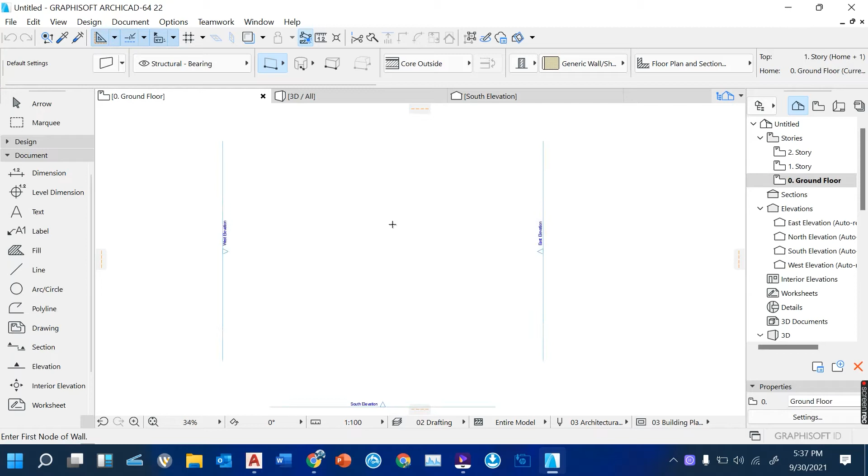When you open ArchiCAD, the white part which I'm showing here is called the model. This is where we make our drawings. You can see we have 4 objects here.

These are just elevations. When you zoom using the scroll bar on your mouse, you'll find that's north elevation, this is west elevation, this is east elevation, and this is south elevation. Your drawing must revolve around this particular section or boundary so that it allows you to view your elevations.

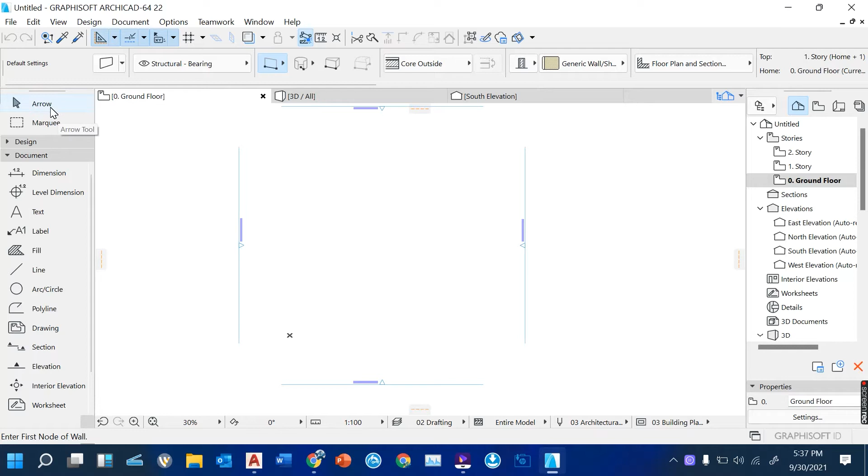These elevations can be moved depending on the size of your project. To pick any object or item in the model space, we use the arrow tool. When you click on the arrow tool, it allows you to select. When you click, you can see them being highlighted one by one up to the top. That's how we select objects or tools or items in the model space.

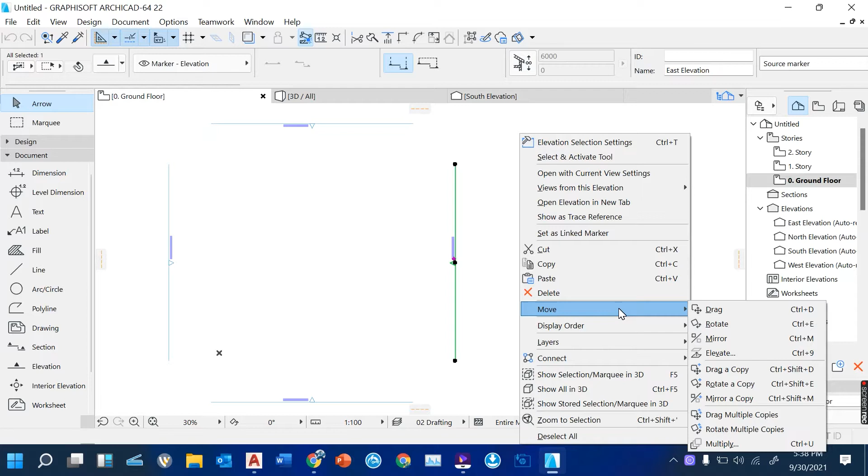You can either move. When you click on one of the elevations, you right click beside it, then you go to move. When you click on move, you can see we have drag, rotate if you want, and mirror. I want us to drag. When you click on drag, you click on that elevation, then you can drag it to enlarge, or simply reduce the viewport. You can enlarge, then click out. Another shortcut, you can click on that.

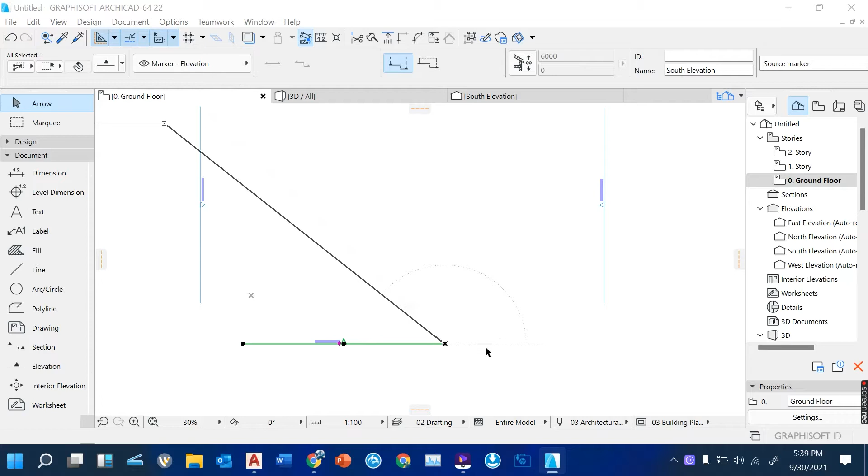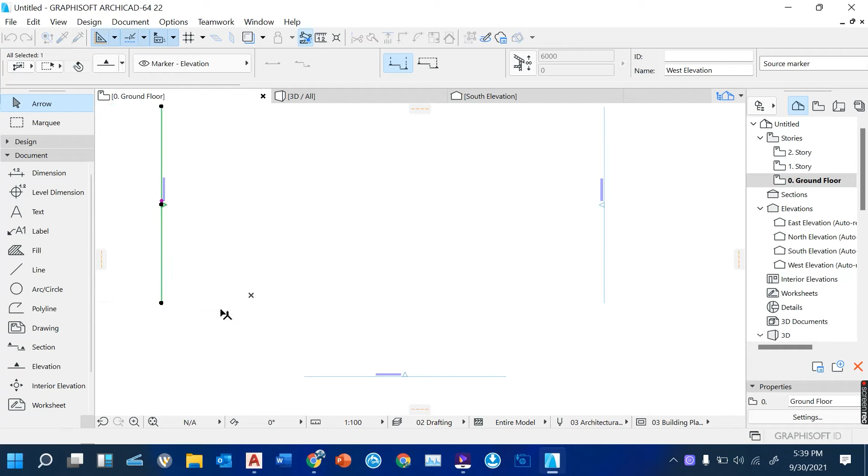These black circles on the item are called nodes. These nodes can be adjusted or used to drag. When you click on a particular node, a flyer pops in which allows you to move. You can see I'm still moving, so you can enlarge your area. You just click and then drag. So those are some of the ways you can drag or stretch elements using the nodes, when the flyer pops in after clicking the node.

As we continue, on the left side of the screen we have what we call the toolbar. The toolbar contains various tools used for designing an architectural plan. It's divided into 3. Let me close that arrow. You'll see we have design - the arrow is for selection. Then we have design; when you click to expand the arrow, you will find the design elements or design tools for architectural work.

They range from wall up to mesh. These are various tools required when doing architectural designs. Then we also have document. When I click on document, this is now the documentation detailing or describing your project or plan that you are designing. We have the dimension tool, text which you can type, fill tool, lines and much more. After document, we now have more. Under more is where we find other elements which you can also insert in your plan. That's the toolbox.

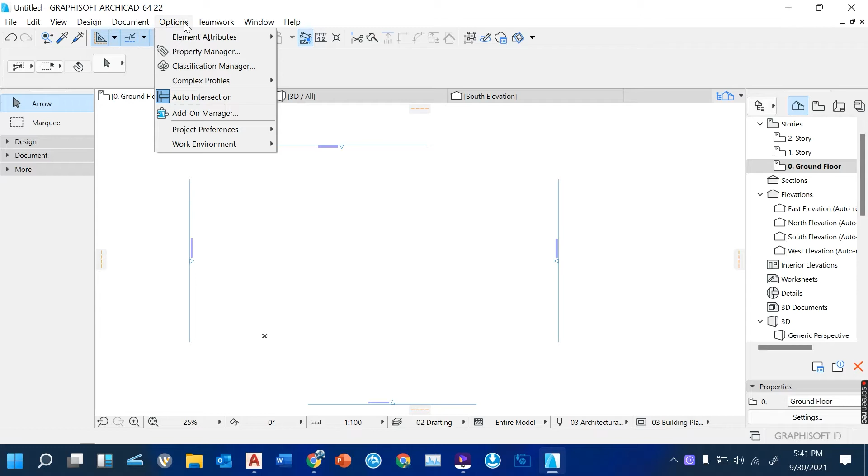So when you come to Window, they are also called palettes. So when you come to the palettes, you can see here we have toolbox, info box, and the navigator.

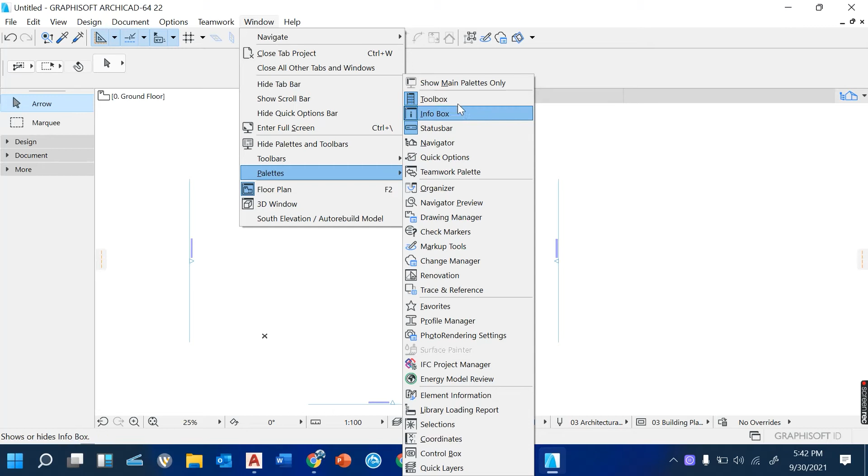Now they are all appearing on the screen. So I just want to click that. When you click it, it goes off. Sometimes maybe you closed it by mistake. So under window, you come to palettes. Then this is also called the toolbox. The little toolbox goes, so on the left we don't have nothing. We don't have the toolbox, and also don't have the navigator.

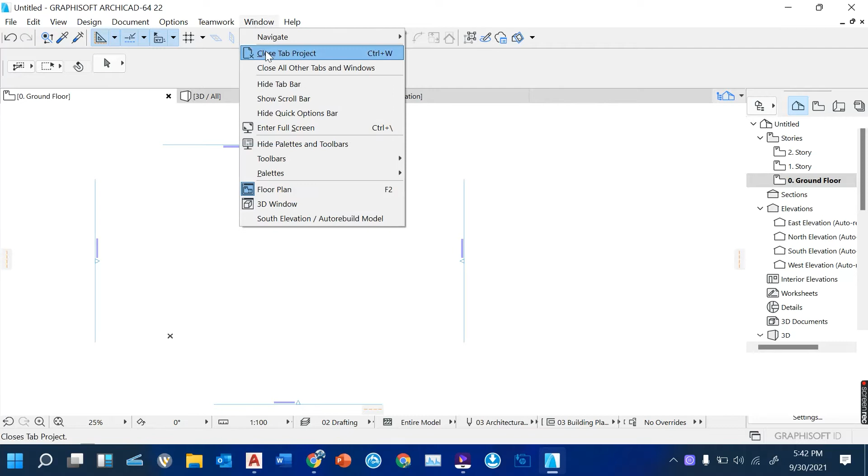So to bring them back on the screen, you still come back to window, then you click on the palettes, then just click to activate. So when you click on the navigator, you will see the navigator appearing on the right of the screen. And again, on the toolbox under the Windows tab, we have toolbox. When you click on the toolbox, you will see our toolbox appearing on the left side of the screen. So you can see that's how we can bring them on the screen.

And any other palette that you would like to use when you are doing your architectural plan. So generally, that's how we bring on palettes, how we can move elevations, how we can bring back our toolbox. Sometimes you have closed them unintentionally or mistakenly when you're doing a design. You can still bring them back, and then you can still see them appearing here on the screen.

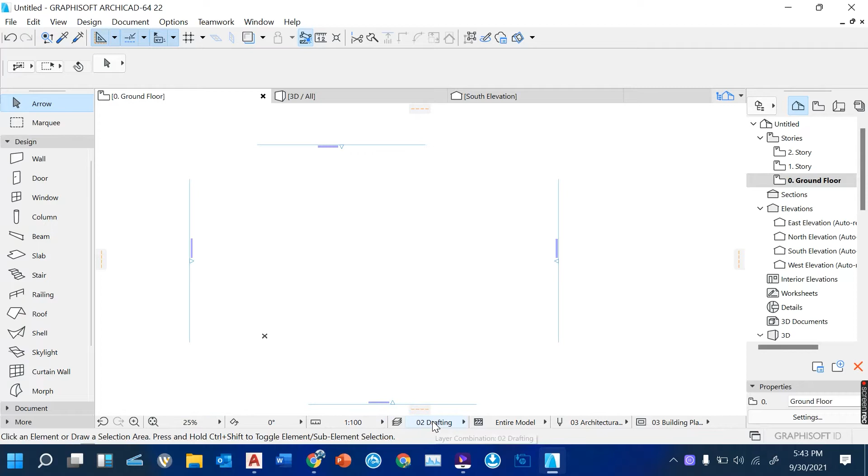Down here, we have this status bar. We have scale; you can choose the scale that you want to use for your designing. And then these are just by default - drafting the entire model, architectural, and then also the zoom.

You can also zoom up to 25, or you can just use your mouse. As you click the mouse, you can see the zoom also increases when you scroll the scroll wheel in the mouse. So you can also increase your zoom to make sure you have a clear visualization of your plan or of your project that you are undertaking or designing.

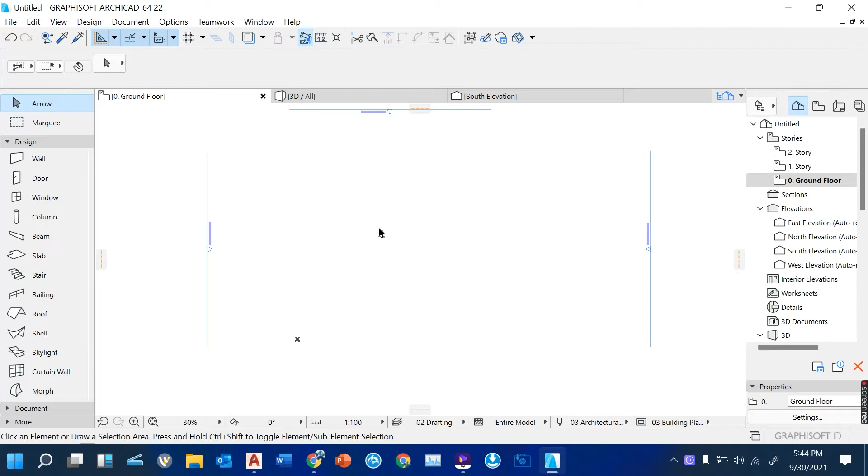Welcome back, viewers, to our continuation of the ArchiCAD program. So on the introduction part, I showed you how we can navigate through the interface of ArchiCAD. So our next lesson, we are going to discuss how now we use various tools to design a simple plan or a simple house plan.

So the concept for any plan remains the same depending on the tools which are here in the toolbox. So if you want us to start, always we start on the ground floor - that's the one which is active. Then we have story 1, story 2. We can also create stories.

So we are going to start with a simple house plan and see how these tools can help us design a simple architectural plan. So to start, always start with your wall tool. So when you click on the wall tool, you will find here in the wall tool we have what we call the info box. So when you click on the wall tool, you can see there's an icon or a tab for the wall. That helps you now make your settings for the wall.

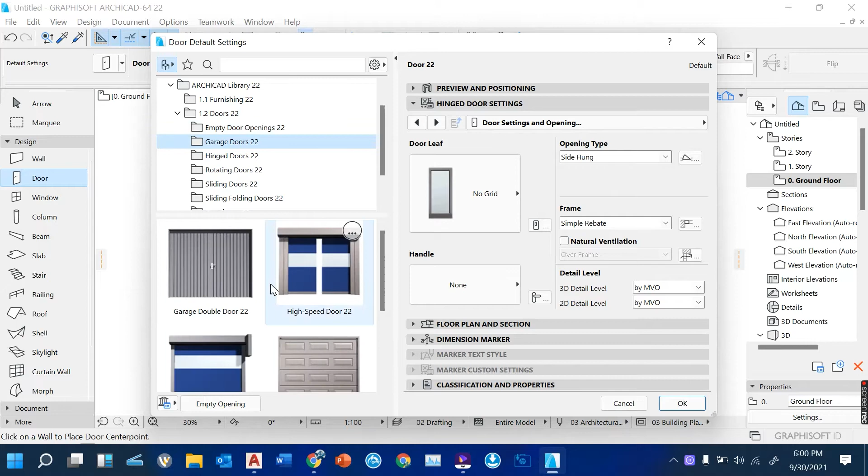Same to doors - when you click on the door, you can see in the info box we have the symbol for door. So when you click, you will find it only opens the folder containing doors, because that's the tool that we have picked. So we have various types of doors. By clicking down here, you can scroll and see the types of doors that you want to use. They have got a variety of doors. Then you cancel. Same to windows.

When you click on the window, you can see the window icon. It will only open the folder containing windows. As I've said earlier, that's the tool that you have picked, so it opens that specific folder containing the particular tool that you have picked here in the toolbox, so that you can have your settings. You can see our settings dialog box appearing.

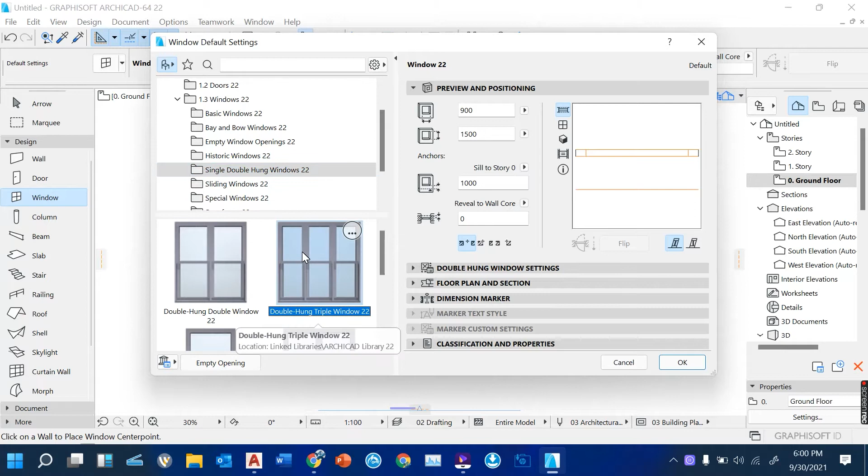So it depends on which type of window you want. You just click on the image and then you make your settings. This is the width, this is height - you can change the height. This is the sill height. From the sill header, you can enter a value so that it starts maybe from a particular distance from the ground floor, and then now you make your settings. So each and every tool that you pick, you must go to the info box or the settings, so that you can change the settings and give it various sizes.

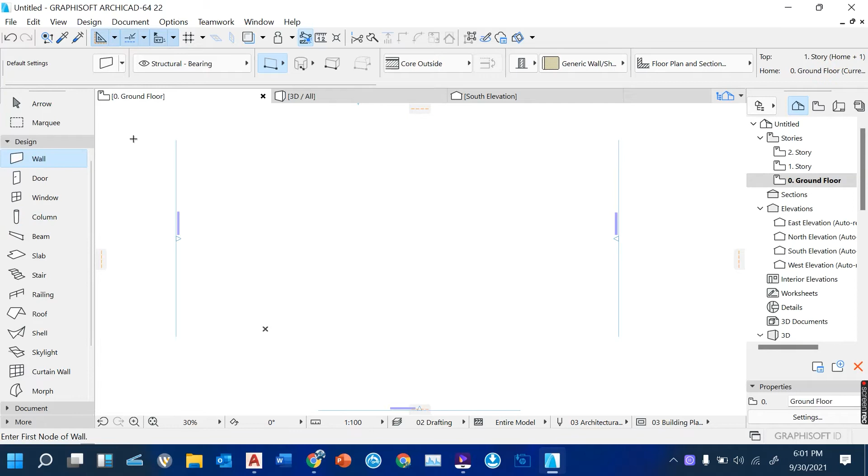So let me start with the wall tool. When I click on the wall, it double clicks on the settings dialog box, so it gives us our wall. This is our wall, this is the height of the wall. By default, it is 3 meters or 3000 millimeters. That's the height, so we can view that in 3D as well.

Then here we have the building material. In the building material, you pick this first one, called structure basic. That will now allow you to change the wall thickness here. You can click on the wall thickness and give it any thickness. It can be 200 when you just type, so our wall thickness will be 200.

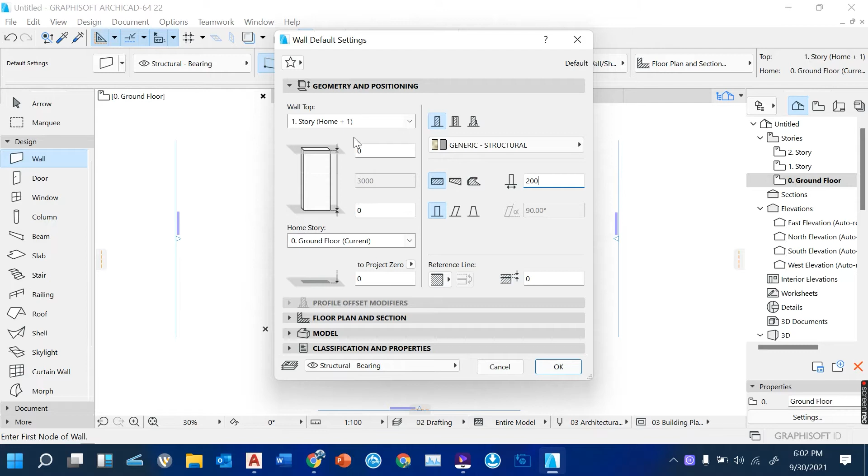You can see our home story is ground floor, and then it ends at wall top, which is story 1. If you want a wall which does not go up to the top, you can click not linked, so you can give any height. When I click not linked, you can specify the height of the wall that we want. In this case, we can have a height of maybe 2700, for example. That's our height, so our wall will be 2700.

And then now here we have a thickness of 200, and then now we have the building material. The wall is always a masonry block. You can click, it can be stone structural, it can be masonry block structural. So that's our building material.

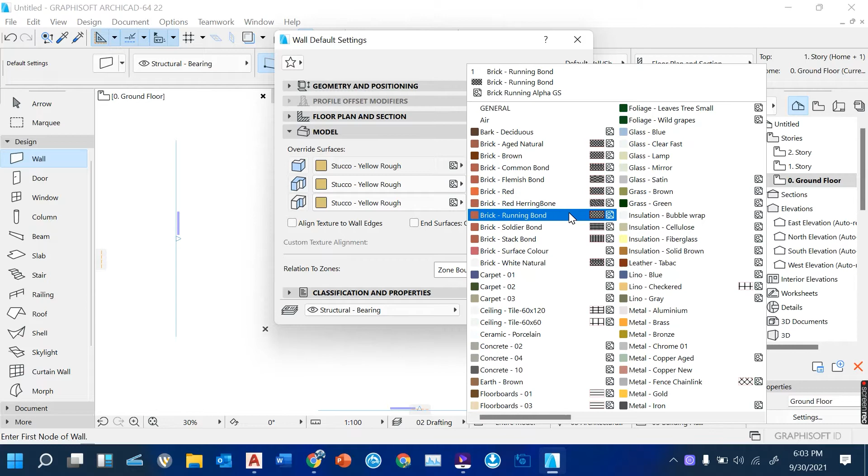This is geometry and positioning. When you click on this arrow for the model, you can change the surfaces for our walls. We have got various surfaces. When you click to open, they become active, so you can click on this. You can link the surfaces so all of them can have one surface. Then when you pick one of the surfaces, you can simply scroll and give the surface you want. Let me pick that, so you can see here they all have that type of surface.

Still on geometry and positioning, we have reference line. It's always good to have the center to avoid losing some measurements when you are drawing or dimensioning. This center means when you are drawing the wall, the reference line will be at the center of the wall. So if the thickness of the wall is 200, when you pick center, we are drawing at the center, so this side and this side will be 100. That's our height, then you click OK.

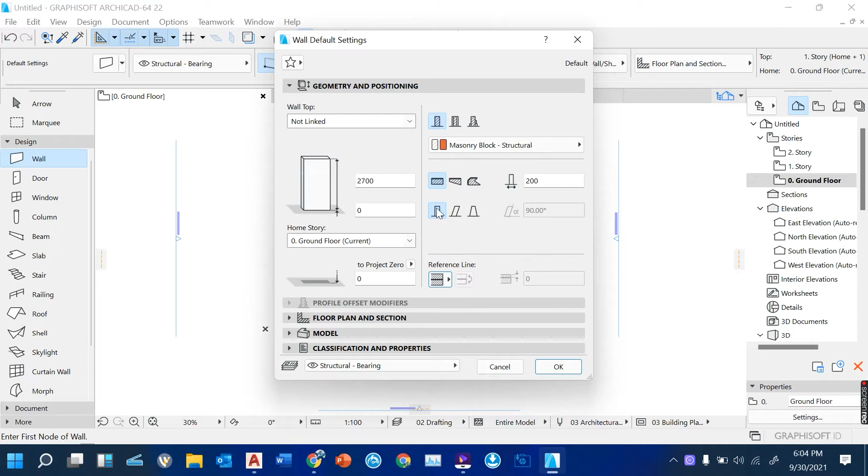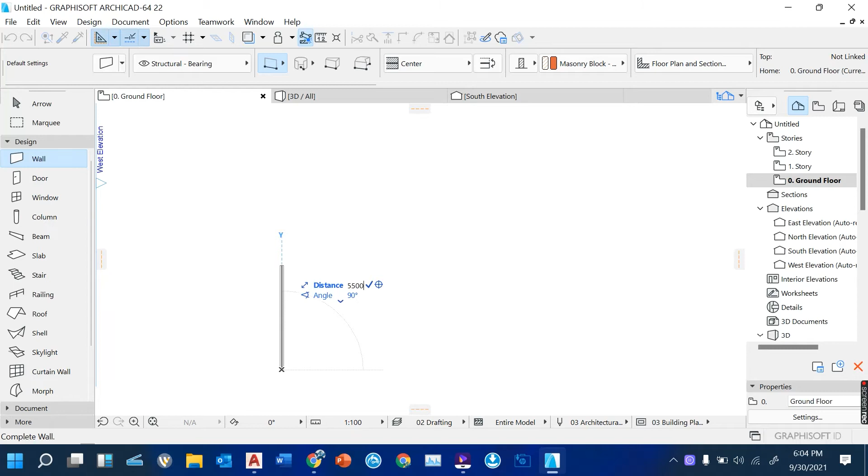So you start to draw your wall. When you start to draw, you can see center to center, you will see that reference line. To draw a wall, you simply click, give directions using your mouse, and then type the distance of your wall. So I need a distance of maybe 5500. Just type 5500, then hit your enter key. When you hit enter, you'll see there's a wall of 5500.

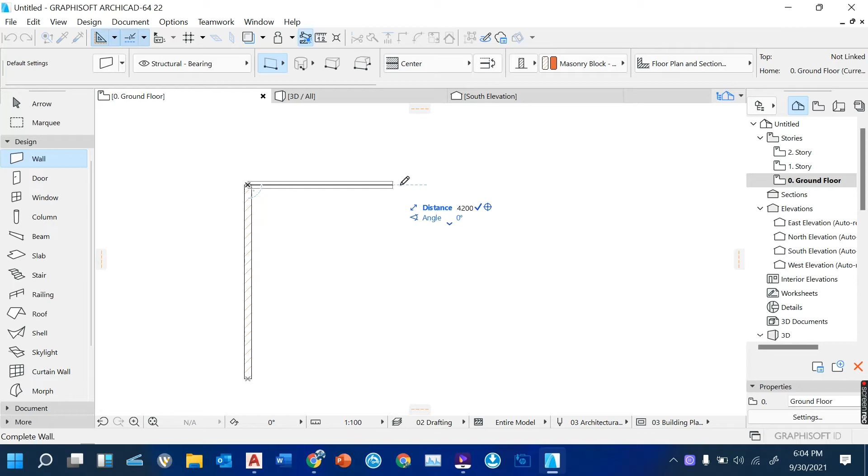Then you pick also on this other end. You want to go this direction to the right, then you can give another dimension of 4200, if that's what is stated. Then you also click there. You come down, maybe that's the design you have been asked to work on, so I can do like 2000, in millimeters. Then you also click, and then you drag your cursor, making sure it is straight so it does not go diagonal. Here we are still dealing with a straight line.

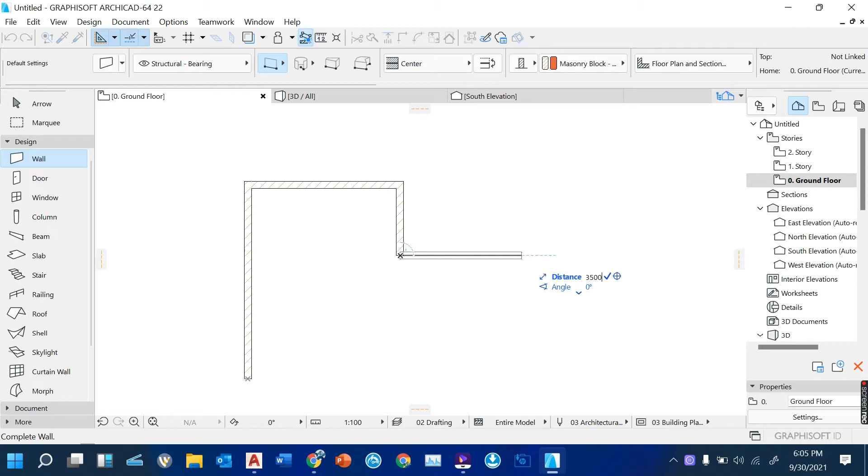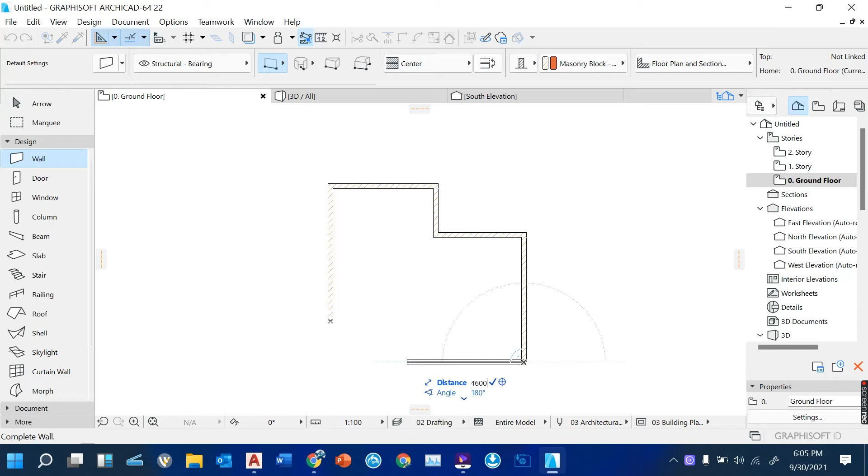So there we need a wall of 3500, then you hit your enter key, and you just move on like that. You can still change here, you can do a 5200 wall, and then come back here. If there's a wall that you want, I can do 4600. Just type, then you hit your enter key, then you come here.

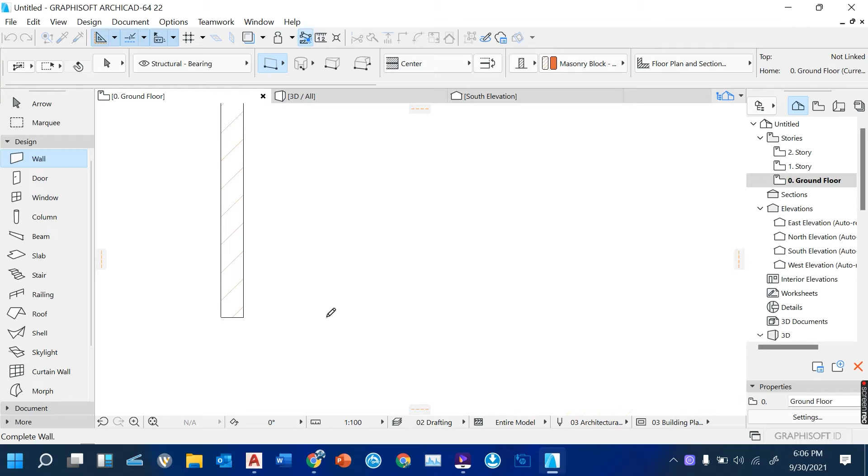So I want to make sure this wall and this wall are on the same level. Once you have picked the wall and given directions, you press and hold the shift key, which means it does not go diagonal. Then there's a reference line showing there, I hope you can see that. So I can match it with this so they can be on the same level. Then you click, find this wall, and simply join this with this. Then they join up. That's how we draw a simple wall.

Of a house plan, remember our height is 2.7 meters. At times you can decide to add more walls, just click, and then you pick and join from there. Simply click and then join those other walls. So we are doing the partitioning.

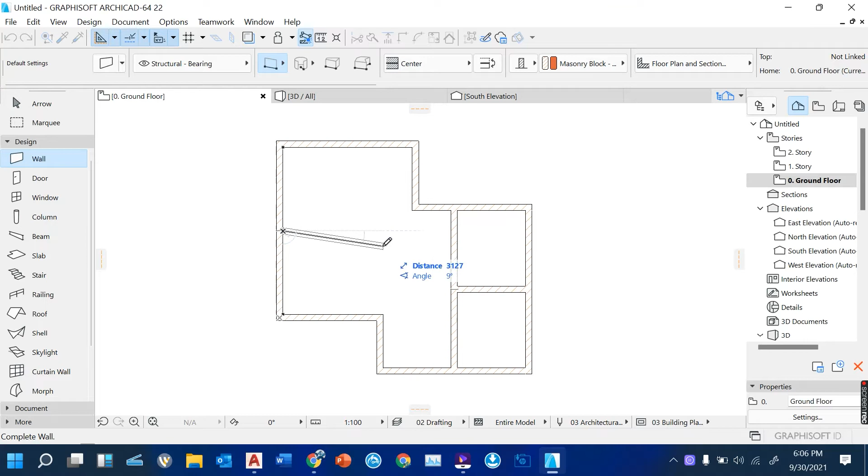You can simply click there. Just escape, that's a little bit too small. I can click there, then draw my walls. You can see how now my walls look like. So that's how we design walls in Archicad after doing your settings here.

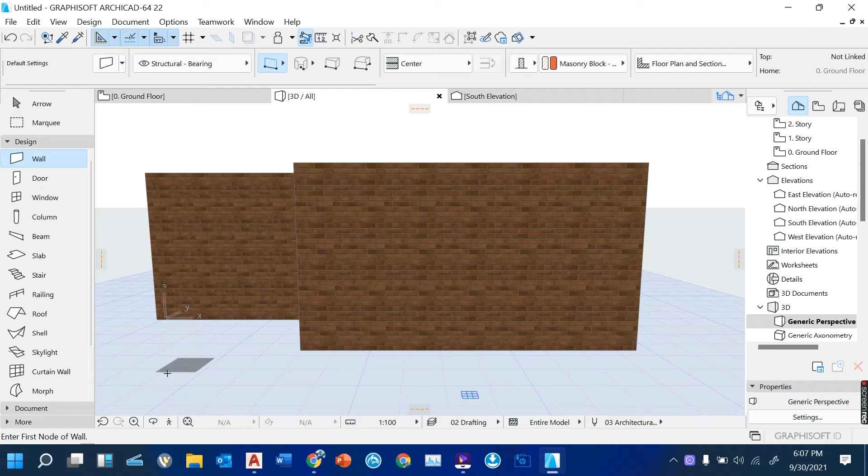So when you click on 3D and then you zoom, you will see we have our wall positionings there. This height from here to here is 2700. And then now we can come, this one is for orbiting, so that you can have an overview on how the 3D wall looks like.

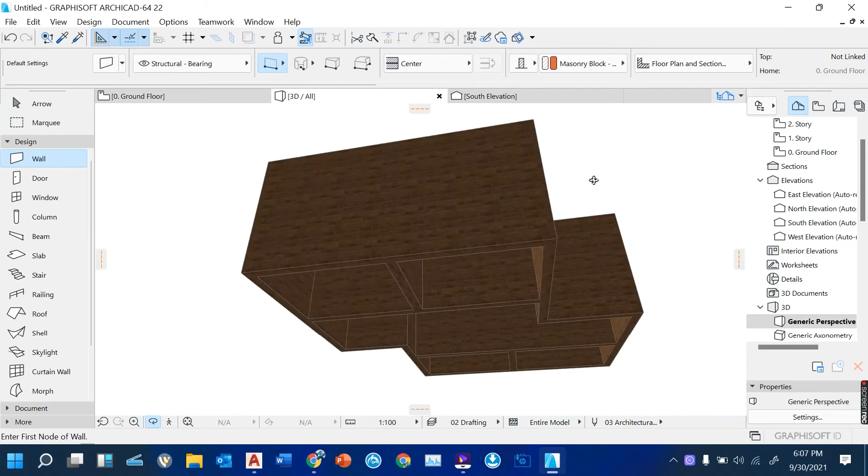The thickness was 200. So as you click and hold the left side of the mouse, then on the orbit, you can now navigate and see all the sides of your walls. So that's in 3D. So just escape and then go back to ground floor.

You will find you are going back to the floor plan. So we've done our settings for the wall, the height of the wall, the thickness, and the materials. That's how it's done in the info box.

After doing all this, now I want us to show you how we can do our floor or our slab. Same thing, you simply come to slab, then on the settings here, we have the slab icon. You just double click, and then it will open. Or you simply double click on that slab tool, then it brings you to the settings for the slab.

So same thing for the settings for the slab. You pick this one, because this one you can easily change the thickness of your slab. You can see it showing us the thickness of the slab there. So I can have 200 as my thickness, and then the slab goes from 0, starting from 0.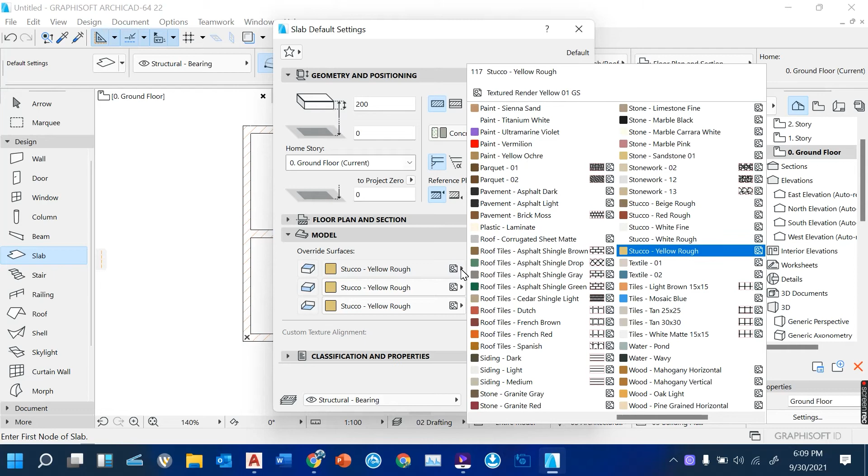The slab is concrete, structural, and then here in the surfaces you can click to open the surfaces or link, and then pick the surface of your slab. So I need a slab of maybe tiles, 30 by 30. So you can see my slab will be that, you will have that surface.

Then I click OK. So your slab, you draw it alongside the wall. And remember, where you start your slab, you go along until you come and close it up, because it's a closed entity. So you zoom and start from this edge.

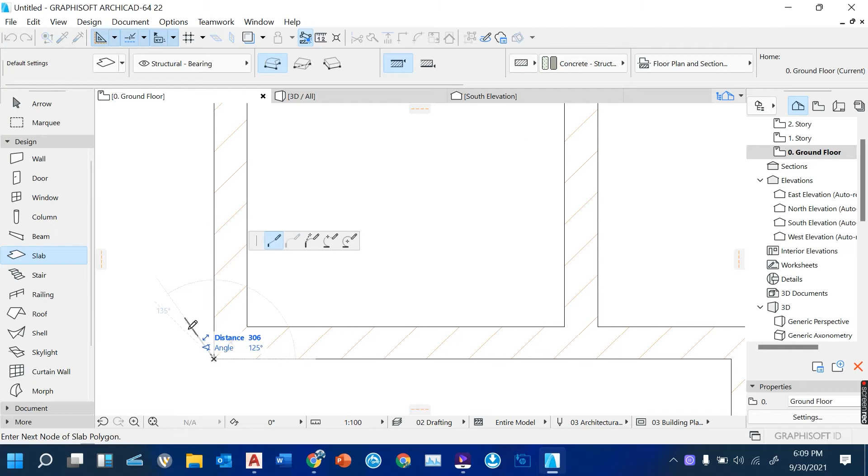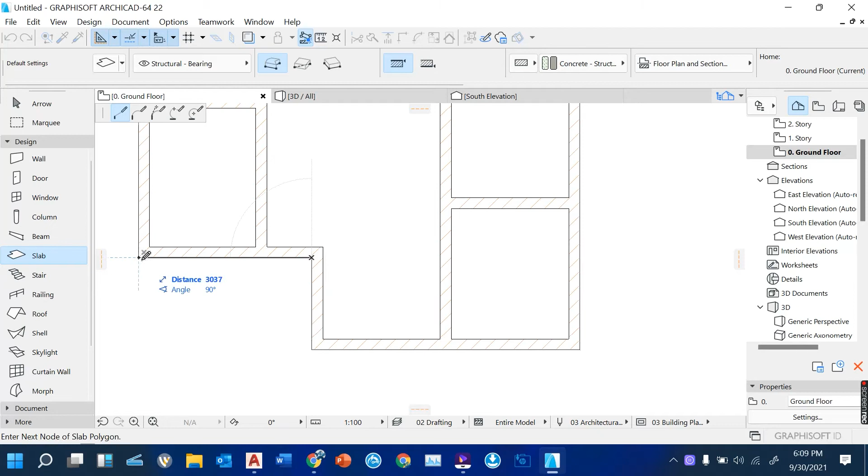Just pick your slab. You can zoom in and out up to that point. You see I'm moving. Just click on the corners of your plan, because I want to make sure my slab is closed. By clicking, and then when you reach here, there's like it will show you a hammer like.

That means you are closing the slab. So when you click that, you have drawn your slab. The slab cannot be viewed in a plan unless now you come to 3D. So when you click on 3D, you will find our slab is down here. That's how we design the slab.

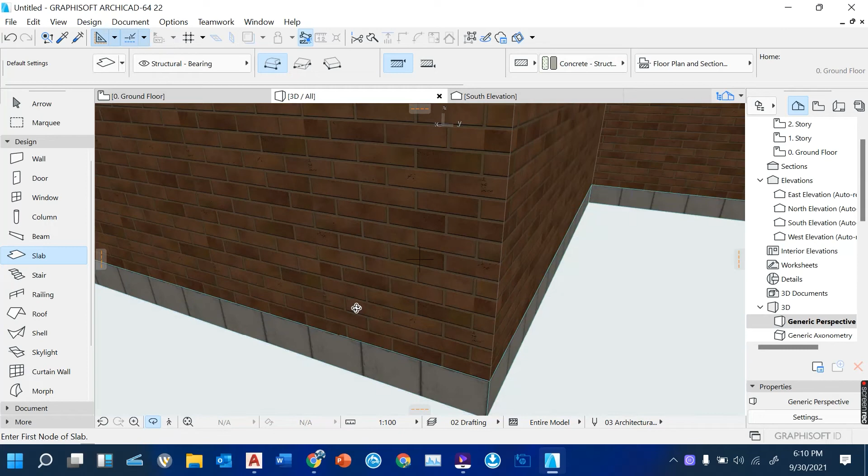You can also orbit. This is for orbiting. You can zoom in and out and see. When you orbit, you will find our slab shown, and the surfaces are also showing. Remember, we picked tiles, so that's how we design walls and place slabs, so that we can see it from top. So that's our slab.

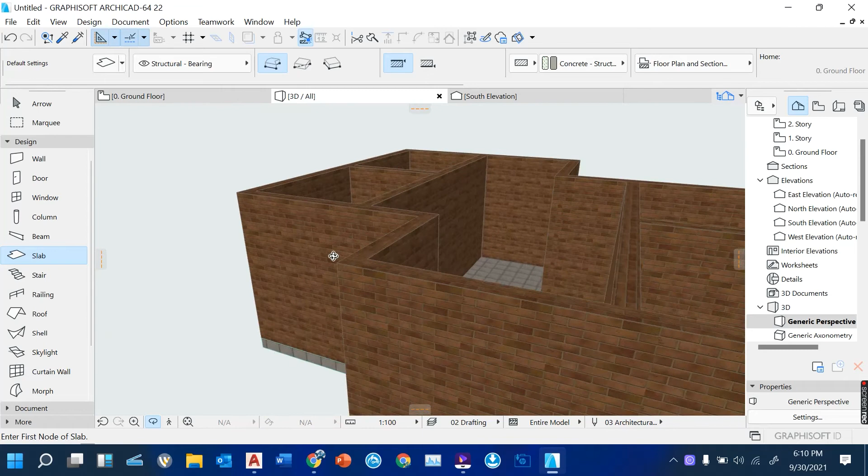That's the surface that we picked for both in and out. You can change another surface if you wish by unlinking, so you can have various different surfaces for top and the bottom of your slab.

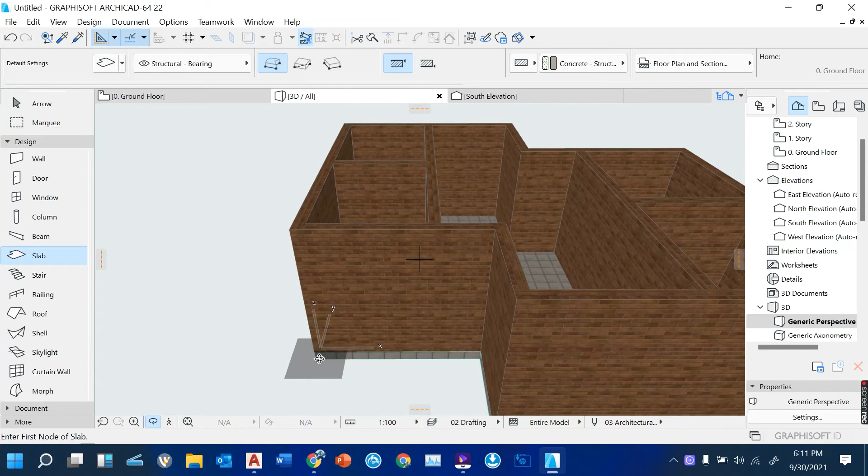So viewers, that's the simplest way of using tools in the toolbar and giving your settings by specifying the thickness or the length or the height if it is a wall. And remember, the slab, when you're designing it, has to start from a particular corner, then you come and close it up. That's when it will form a slab.

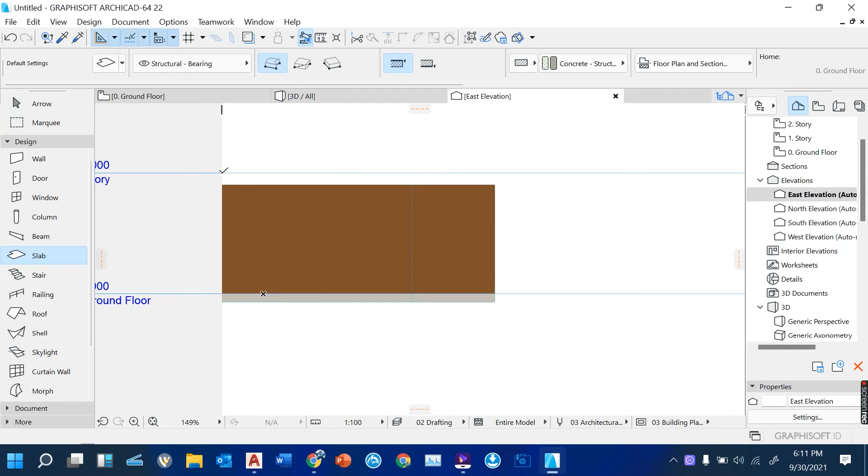So that's it. You can also view your elevations by double clicking on one of the elevations. Then you click and see. Remember, here is 3 meters. So our wall was 27. You can see from here to here is 27. This space we can leave for maybe a beam, when you're inserting a beam, so that we can have a full length from 0 to 3000.

You can have north elevation. Just come and double click. You'll see them appearing there, like that. Then you just click. So you'll see your elevations also showing various sides of your simple house plan.

I think that's enough for this particular time. Next, we are going to see how we can place doors and windows and any other thing which might be needed based on the tools which we have here.

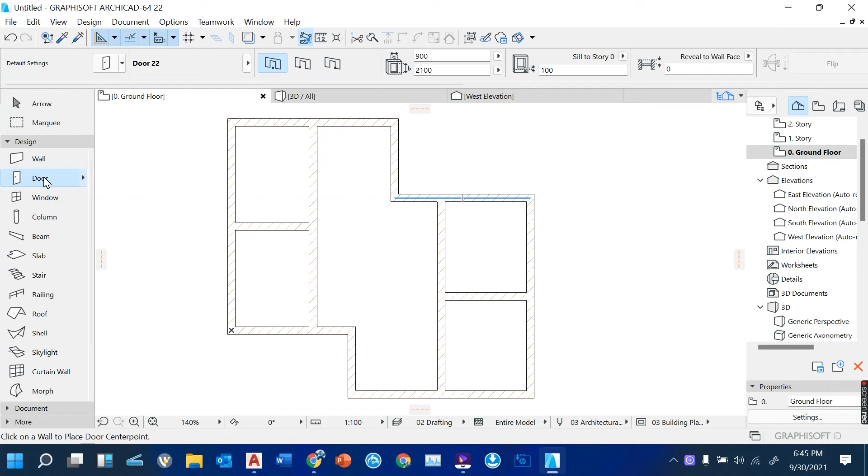When you click on the door, you can simply double click on that door tool. Then it opens the folder for doors. We have got various types of doors. When you scroll down, you'll see the types of doors there. You can pick rotating doors, sliding doors, or hinged doors.

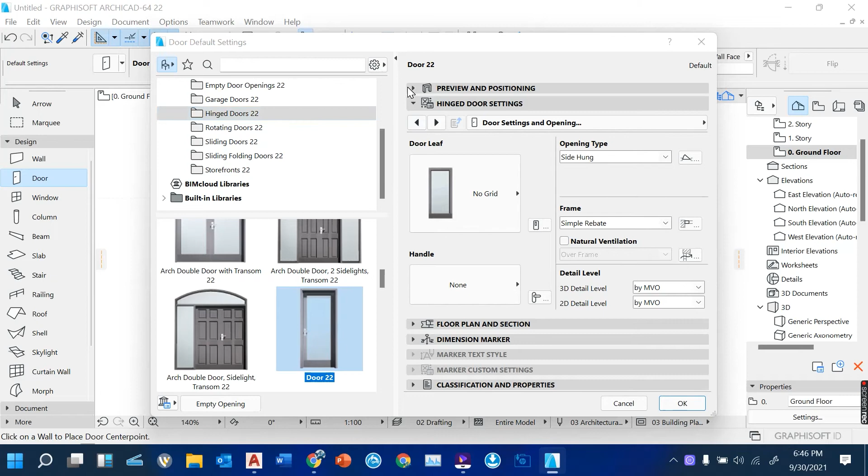Under preview and positioning, that's how you can see that door in a plan. So this is the door which I've picked. I can give the height, the width, and the height. For example, our height I put at 2700, and the width can remain at 900, the usual one. Now this one I make 26 because we have a sill height of 100.

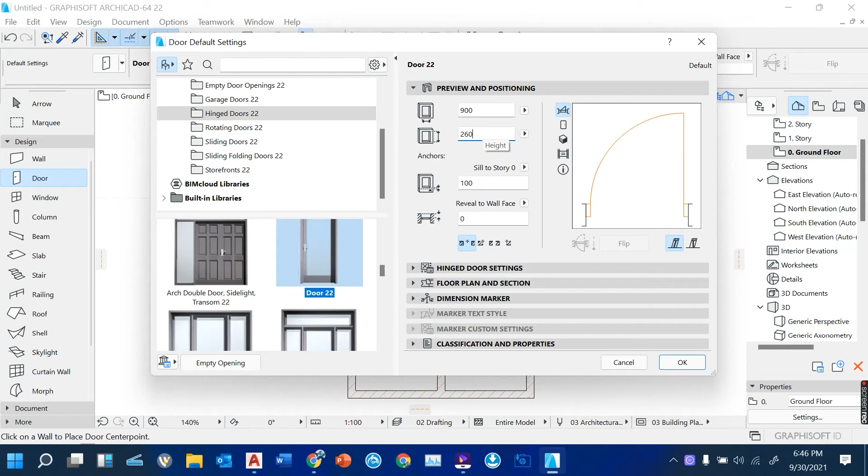In the door settings, you can see we have the door leaves. You can click and pick an appropriate leaf that you want. Then we also have the handle, so you can pick. We have knobs and handles, so you simply pick, and they'll be placed automatically. Then we click OK. So I want us to place our doors.

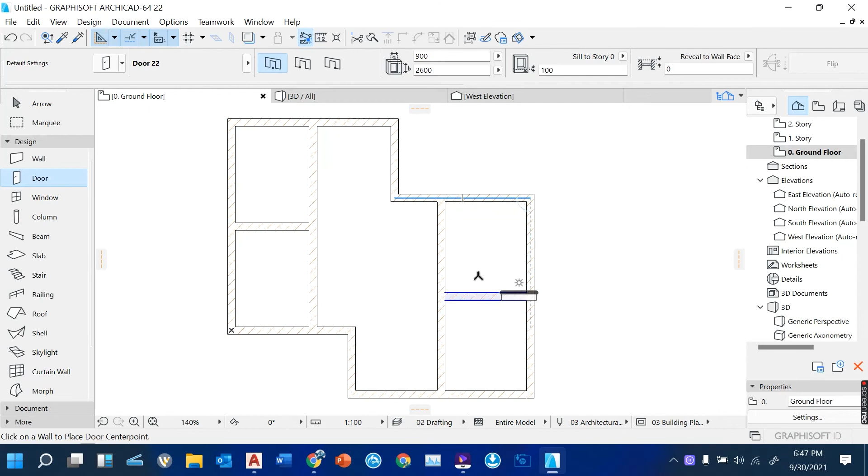Remember, doors are placed on the wall. When you click, you can see that image showing a door in the plan. You simply click, and as you move your mouse up, you can see how you want your door to open. Remember, doors usually open towards the wall. Then you click if that's the position you want, and then place another door.

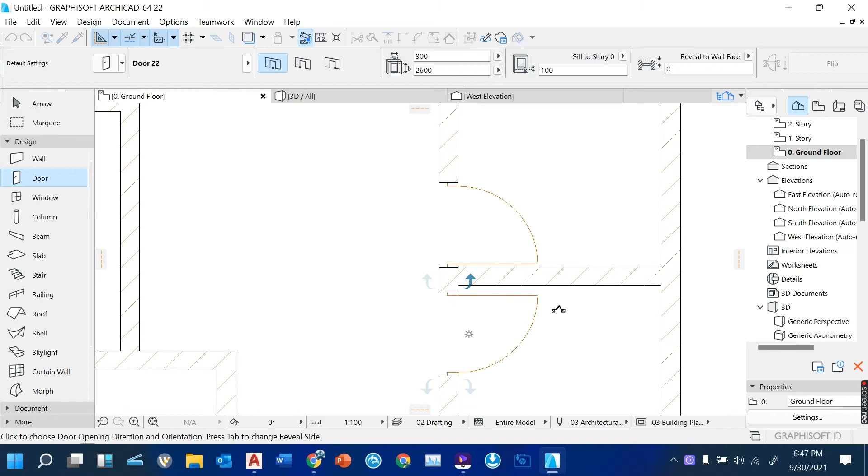Again, when you move your cursor before clicking, you can orient and check the position. Then you can click, and you can see we placed our doors there. Then place another door here, maybe to that wall, and another door going towards that wall. Just click like that, and there might be another exit door going out. So we've placed our doors.

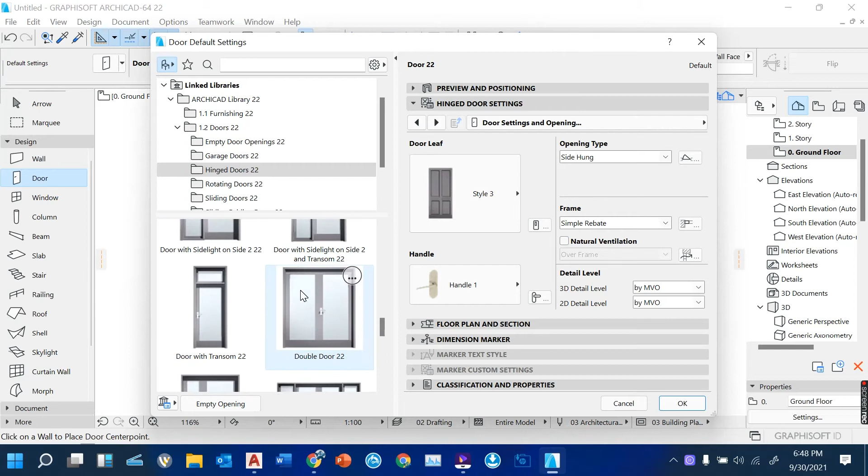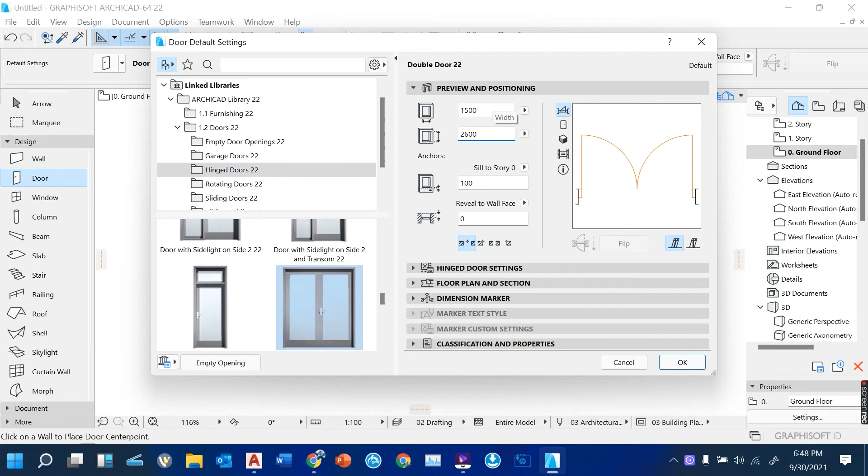When you want to change to another door, you simply double click on the door tool, and pick another door for a big entrance, maybe the double door. Then you can also pick the leaf, maybe with that type of grid, and give it a handle. Under preview and positioning, you can change that to 2600, and also the width of your door. You can specify the width, so we can leave it at 15, then click OK.

So we just zoom in. When you click, this is a double door now, our main entrance. You can move up and down to see which side it wants to open. Then you click, and you can see we have our doors placed in our plan. They can also be viewed in 3D.

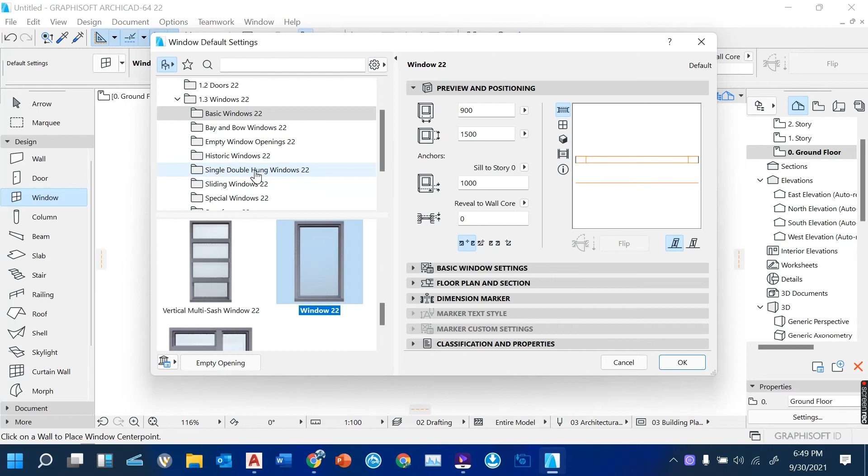Same as the doors, we can simply double click on the windows. Then we've got various types of windows. You always pick single or double hung windows, those are the ones we usually use here. When you scroll down, you'll find we have such types of windows.

So you click to pick a window, and then here you give it the dimensions, maybe 1800, you can just type like 1800, that's the width. And then there's the height, you can give it a height.

Remember, this height plus the sill height, that's the distance from where the floor starts up to where the window starts. Our window, we are doing up to the 2600 level or 2700 level, depending on the height of our wall. So we can change, if this is 15, we can change this one to 12. So 12 plus 15 gives us 27. That's the distance from the floor, which is at 0. Then now we start from up to 12.

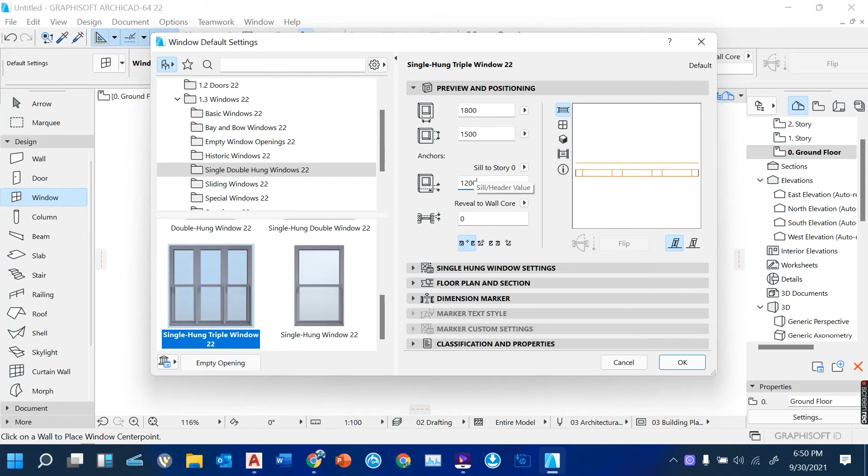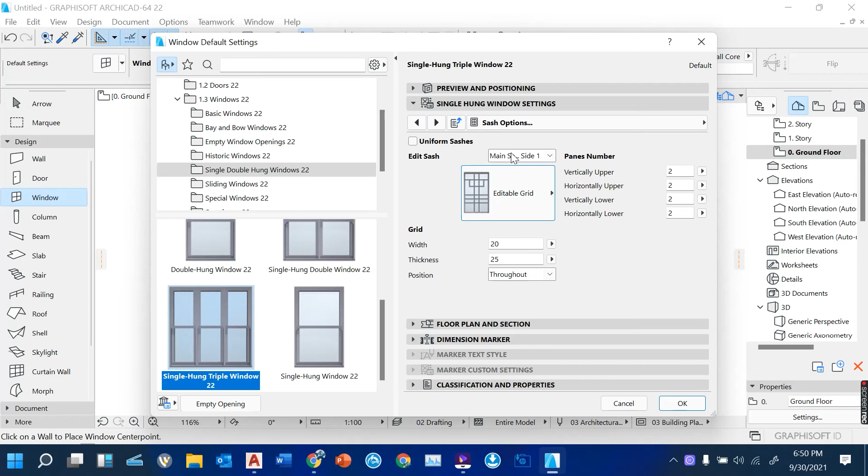We also have settings for the window which you can increase. Under the window settings, you click on this arrow, you can see your settings and change them. Then you can pick the type that you want, no grid or VHV grid. You can pick that type of grid, then click OK. So you can place your windows as well.

Need to place a window there, check on the opening. Also need to place another window, maybe here. Another window here. I might also require a different type of window.

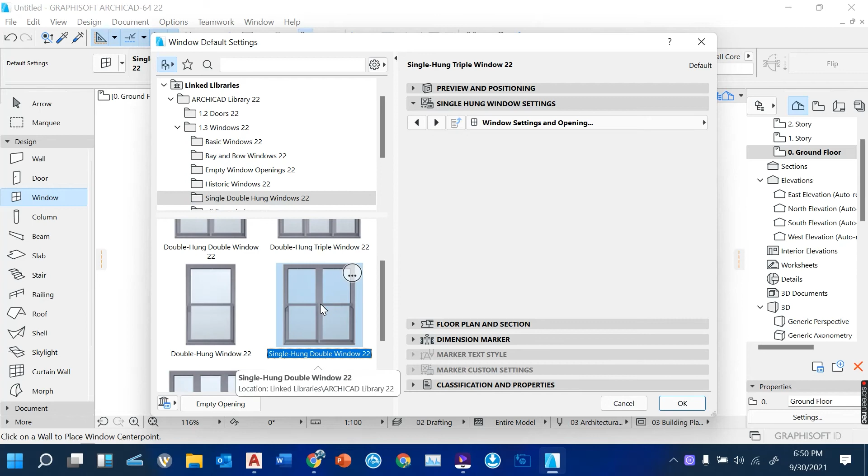Come to your preview and positioning, and you can place your windows in this position. This one we can reduce the width to be 1200. That's a different type of window. Click OK, then come and place that window there. Click out, and maybe if there's another window in this position, simply click out.

So you can place different types of windows in different locations. Click out, that's the opening. You simply place your windows like that. Maybe you also have another window here.

So those are various ways of placing windows. First of all, you check up the settings of your windows, and then from there you give the parameters of the windows you want to place. You can also select a different type of window and then give the parameters.

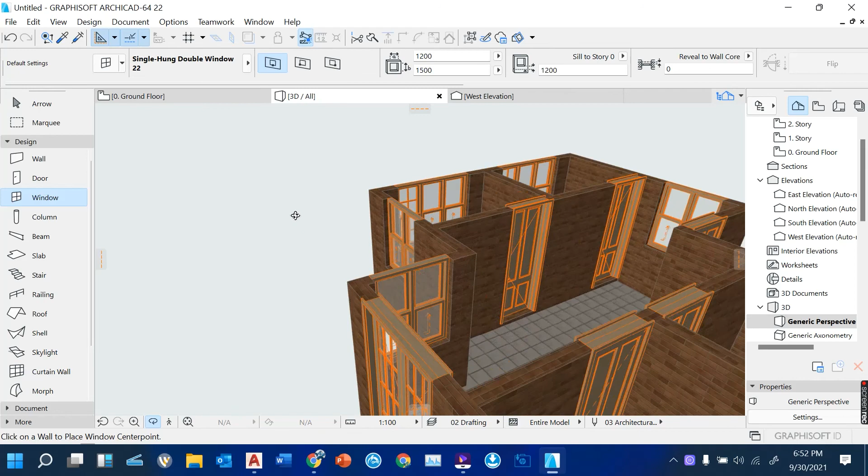So after placing all the doors and windows, now you can come to 3D. You'll see we've placed our doors and windows. This is the sill height which I showed you. These are various types of windows we have placed, and doors, you can see they are reaching up to the top of our floor walls, which is 2700.

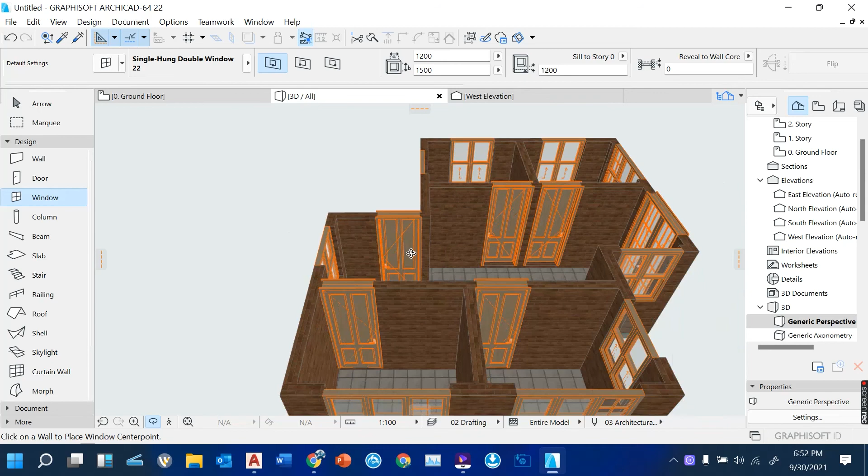So you can see we have the opening, the main opening, plus windows and doors placed in various areas, so that we can have a walkthrough. You can walk through your house plan. So that's how we place windows and doors in our floor plan.

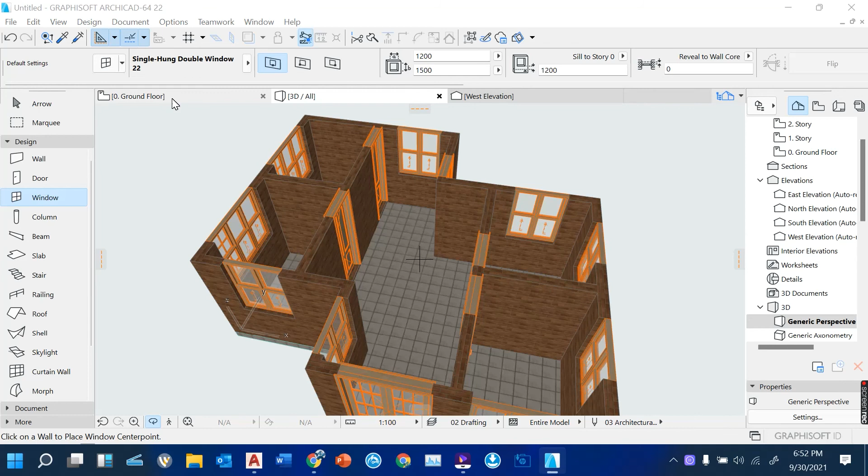Each and every time you want to place a door and a window, you just double click on the icons, or when you click here, the dialog box for settings will come up. So you can have the parameters of the objects for the doors and windows which you placed.

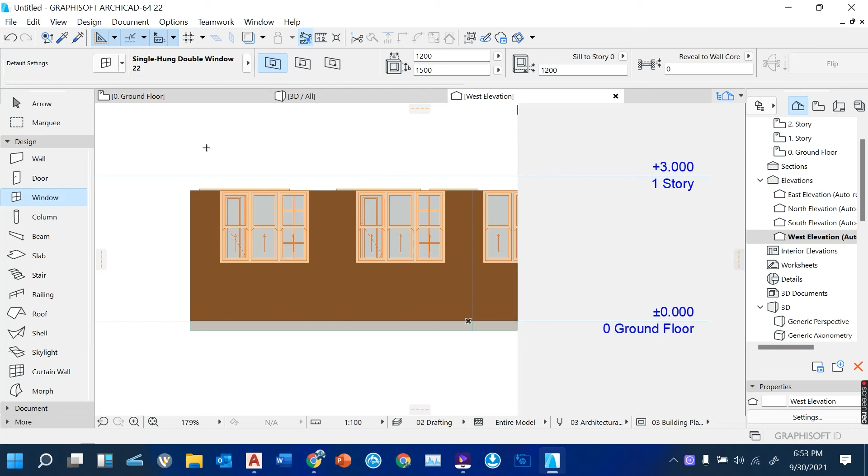Remember, when setting the height for our walls, we did 2700. So we need this space for another upstand wall or a beam if possible, so that we can reach 3 meters high for this particular floor. When you come back to your ground floor, I can pick my beam or double click on the beam.

Now we can change the beam. You can change that height, the height of your beam and the width of your beam. Maybe it's 200, and then here we can have a height of 300 so that it reaches at the top. Remember, we are starting from story 1. So this is the height, 27 plus 300 gives us 3000.

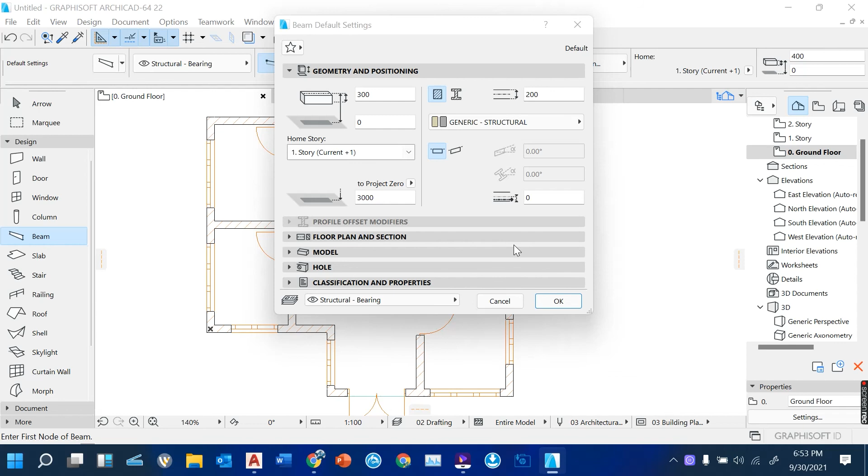Then this is the width of our beam. Just click OK. To draw your beam, you draw it at the center of your walls. You can see the color of the beam as you place it.

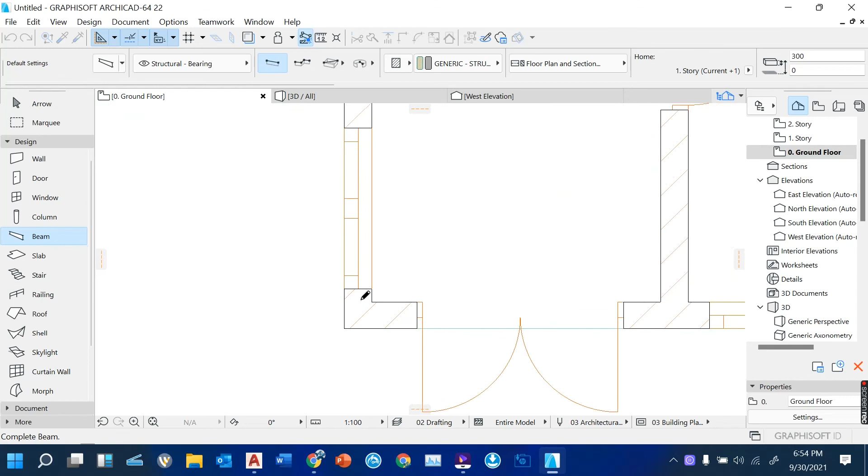Come to that end. You can see as we place our beams, the beams are always green in color. Then join this with the other one. You can see the beams have been joined. You can also pick another side to have your beam up to that end.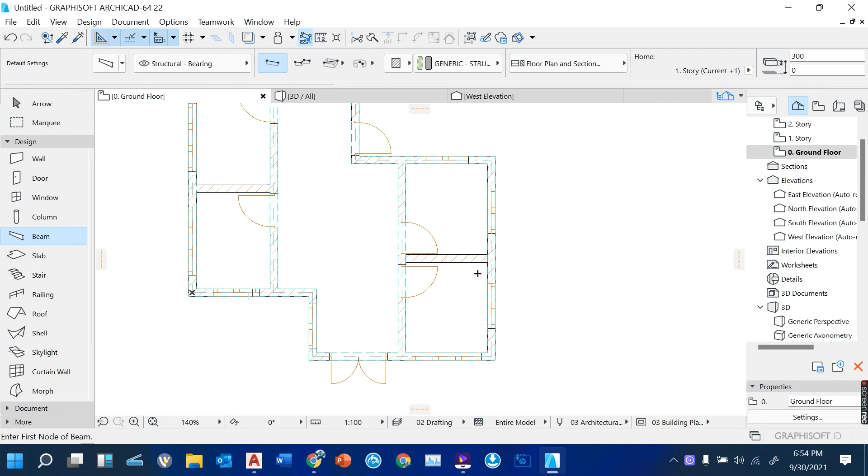And also here, you can have another beam. So you can see our beams are joining up. They are dotted green in color. So you can place your beams, an example here, like that.

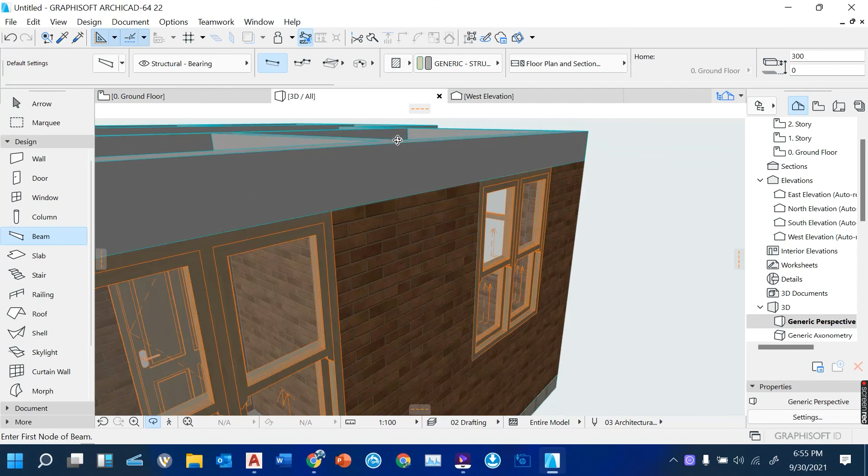So when you come back to 3D, you'll find we have our beams placed. You can see the windows reach up to the beam level where the beam was started. We are given a height of 300, so that's the height of our beams. So you can see in our plan, we have a beam or beams placed.

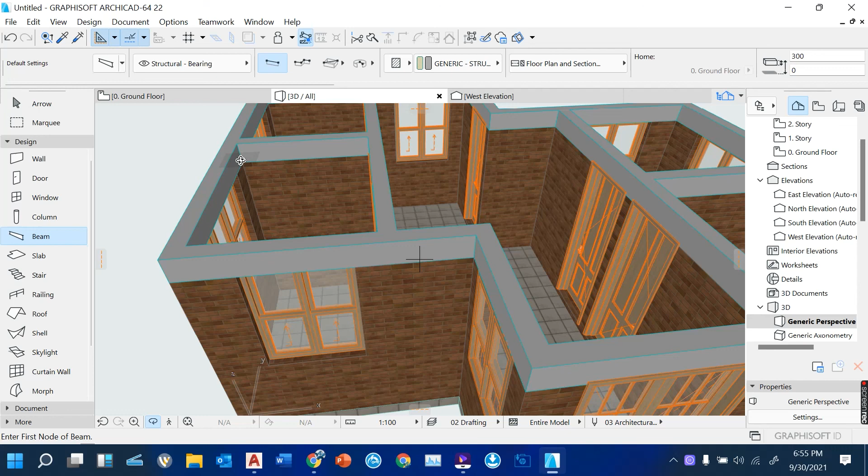So that's how we insert beams, settings for the beams, how we insert windows and doors, and have the parameters for each and every component which you have. When you come back to one of your elevations, you will see we have our beam of 300 by 200 with 300 height, which is from here to here.

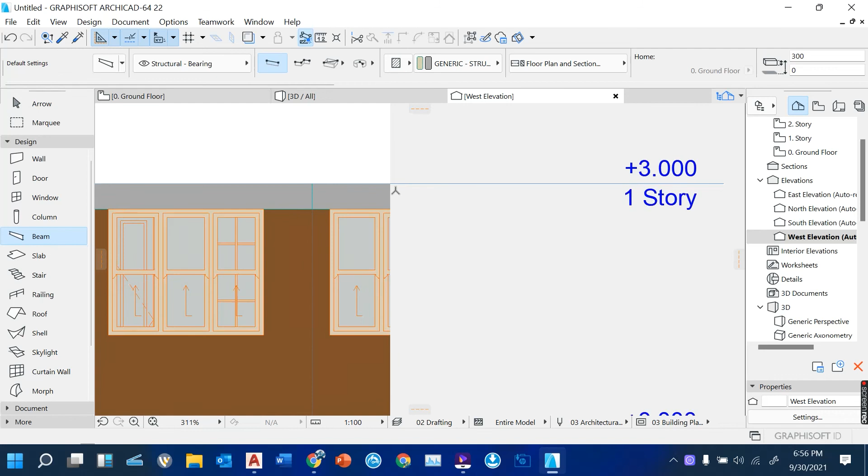Remember, this wall is 27. So we have our beam, so we are reaching up from ground floor to first floor. We have 3 meters high, plus with the beam, slab, wall, and the beam.